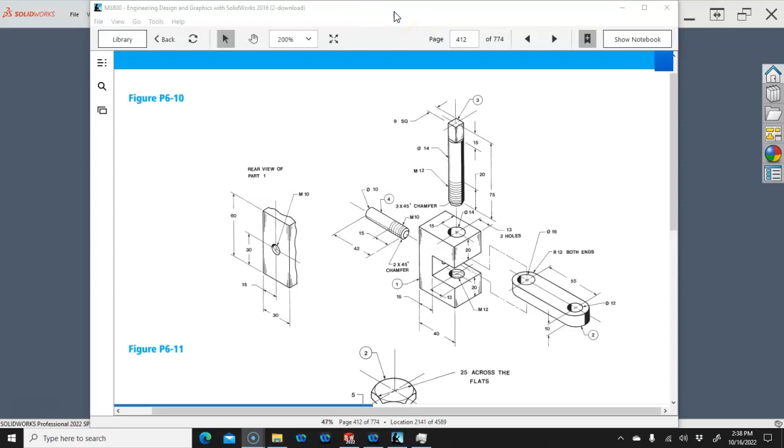Okay, so let's go ahead and get our part started, and we'll do the C clamp, or the C shape. So let's fly that out of the way. We'll start our metric part, and we'll go with the front plane and a sketch.

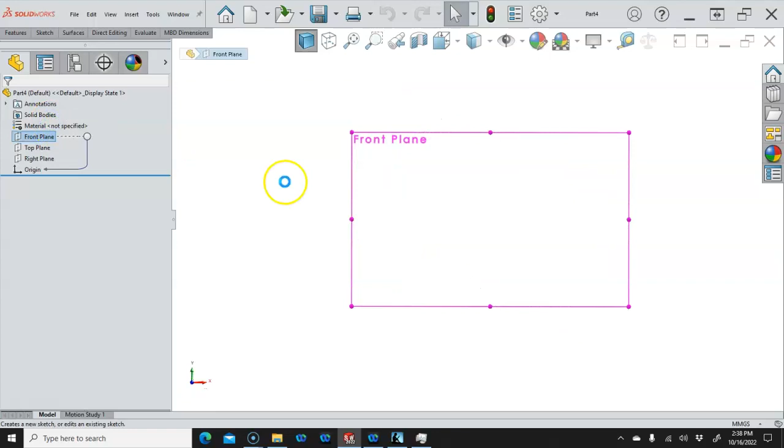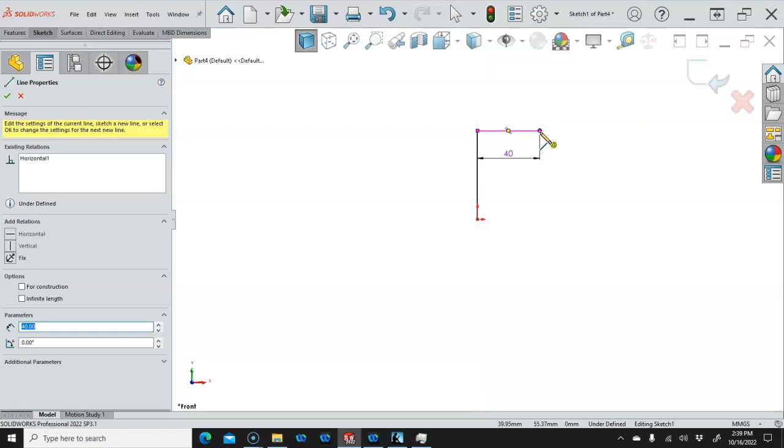And if I do L on the keyboard, then it doesn't really matter where we start. I want to stay with their dimension scheme though, so probably we'll drag that out a little closer to 60. And then across the top we have 40, and we can do that on the top or the bottom, doesn't really matter. And then that one is 20,

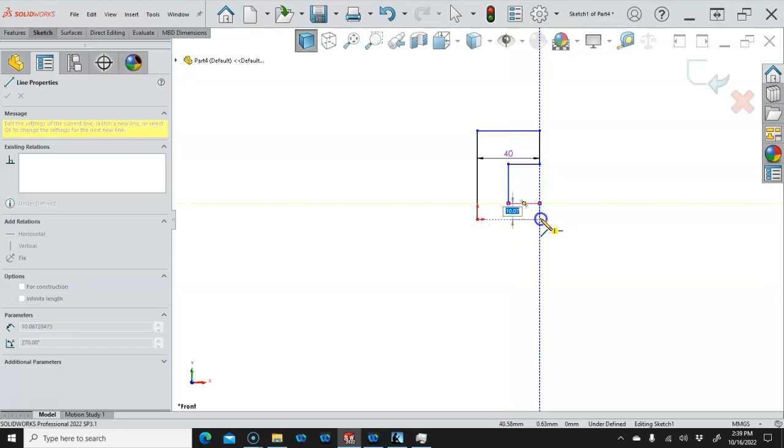20, and didn't take that one for whatever reason, so let's go ahead and fill those in, and we'll try again. Okay, and since it didn't quite line up, I'm going to go ahead and connect the dots and then just go back and tell it that it's horizontal.

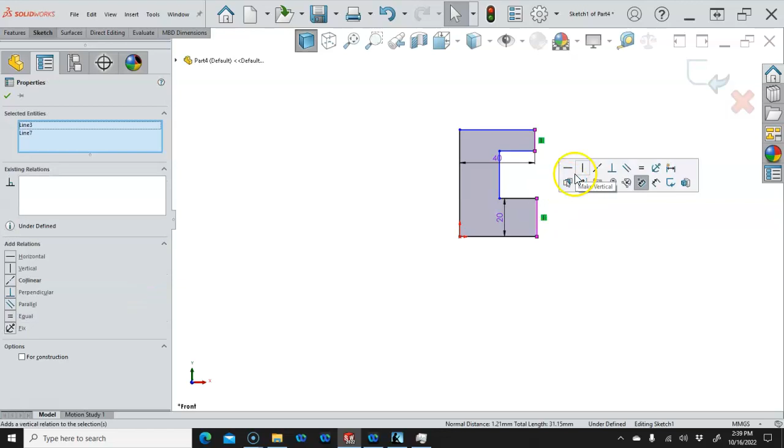Alright, so selection is if I think that these are always going to be the same, then we'll start off with collinear, and then I'll make them equal. And that way we have the 20.

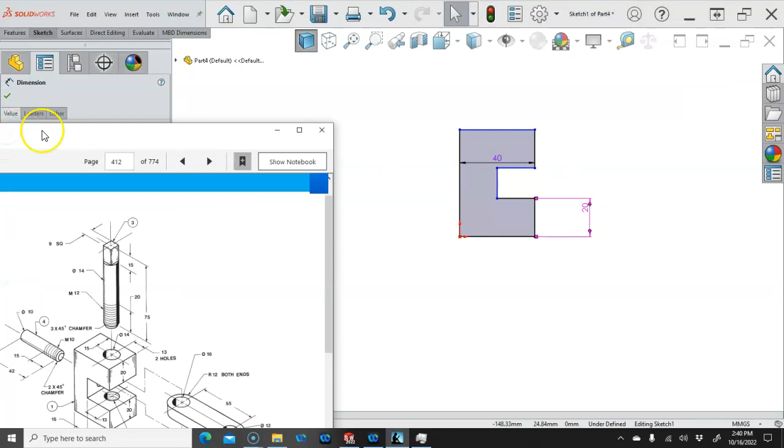Let's see, the distance in between. We go ahead and fly that in, see if we can find it. That may be a missing dimension, in which case we have a thickness of 10.

So we need a little bit of clearance, and then that one's an M10, so probably wouldn't put over a millimeter of clearance, but if that's going to be 16 with a 12, that's like 2 millimeters on each, on the radial. That's a lot of room to move around.

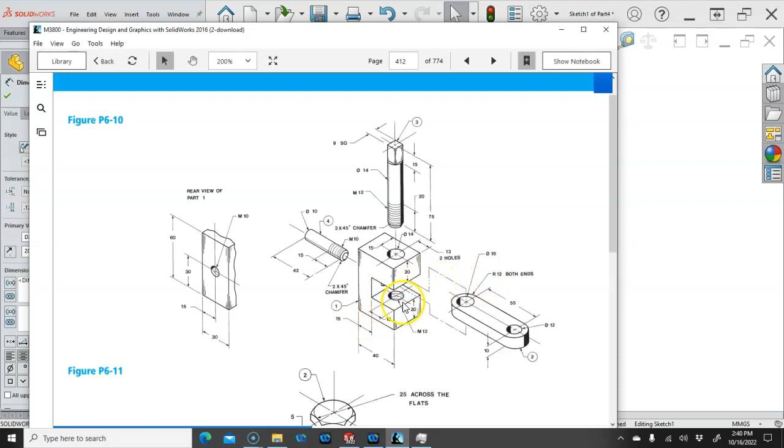And I'm not seeing that thickness, so you get to decide. Probably would expect something like 12, but I'm going to go with 11.

So let's pick the shape. And since there isn't one, I'm going to do an overall then.

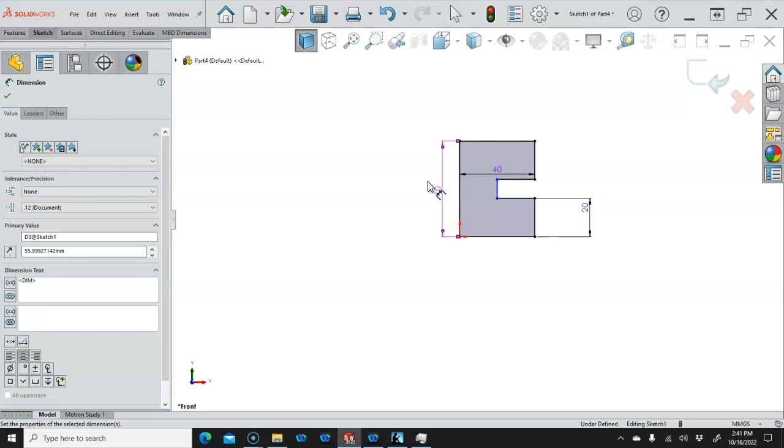So if we go 50, that'll put it at 10. And that would be kind of a standard number. I think probably too close. So let's go with the 51.

Okay. And then in our tolerance, let's see, 25.4 millimeters to an inch. And then that would put us real close to 2 inches anyway.

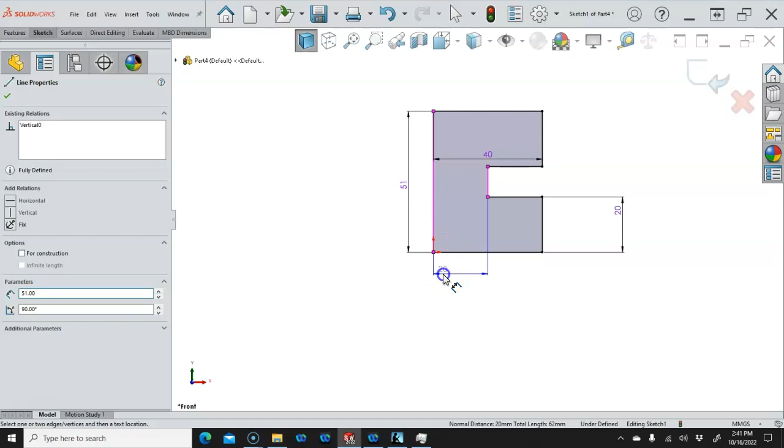All right, and then the depth, we have 15 millimeters from the back on the side, and that'll get us started for now.

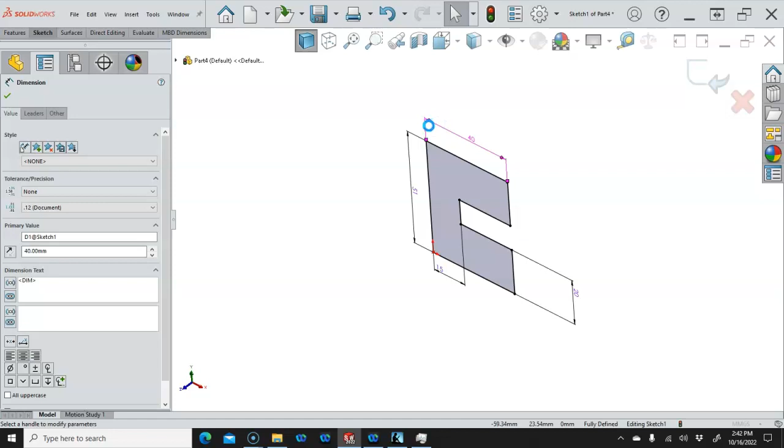So a right click and extrude. And I think previously when I've done this project, I've made it mid-plane. So if we do mid-plane, we can take advantage of that being on center. It doesn't really matter. So let's see, we have 15.

Is there a 30 somewhere? So again, looks like a missing dimension. So let's just go with the 30.

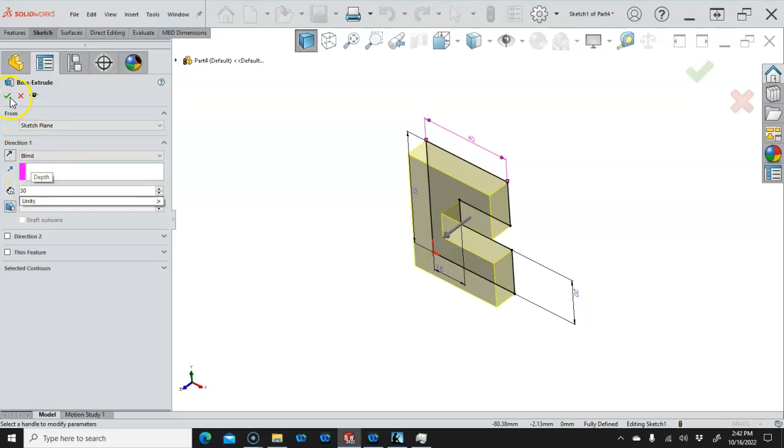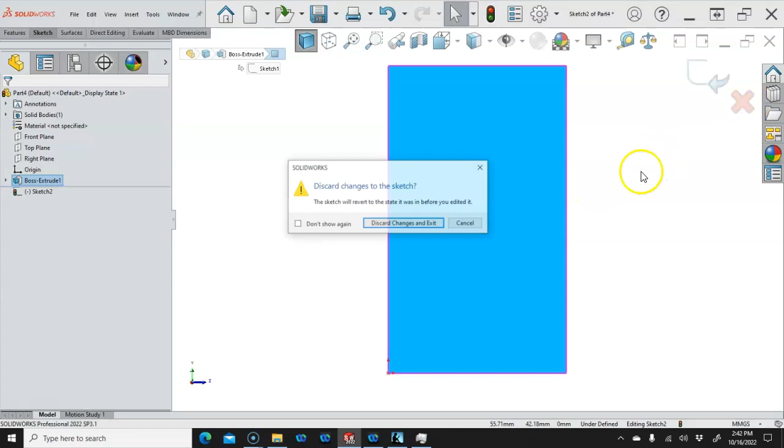All right, and we'll start with the M10 on the back, and since they're not giving us a pitch, I'm going to go S key, and that was a cut extrude, not the. So we'll try that again. Pre-select, S key, hole wizard.

There we go. They look kind of the same. And we'll let that come up. We're in ANSI metric. Going to thread.

Let's go ahead and reset. I usually reset the custom sizing. Don't really remember what I did last time.

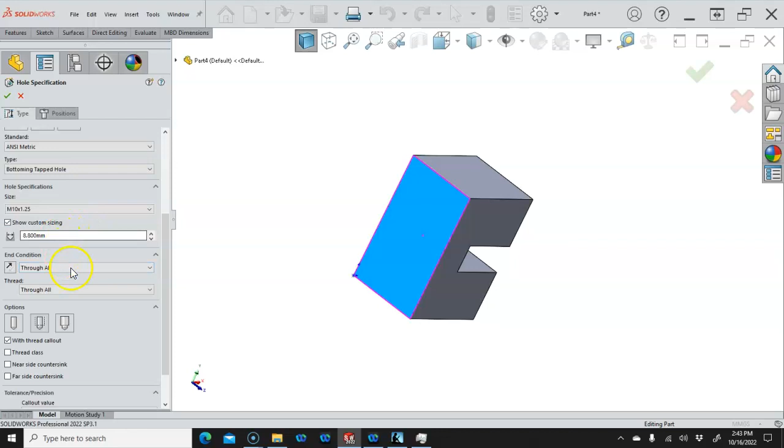So M10 by 1.0 is fairly fine. 1.25 is in between, so probably more common, and the 1.5 is a fairly coarse. So custom sizing through all, not really going to hurt anything. Positions. All right, and then we'll make sure that we're in the point tool.

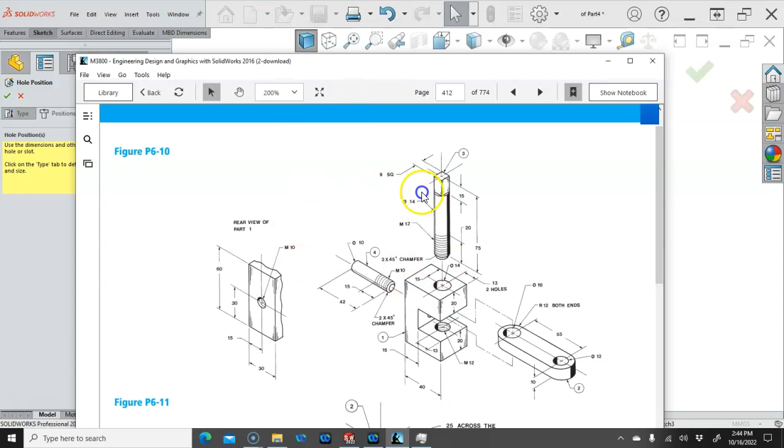And this one is going to be centered, so I could put it in the middle. So they have 30 overall, there was the 60 overall, so it was 20, 20, and 20. Somewhere in here, as we go through the iterations, we find it. There was the 60 on this side and 30 to the middle, so that's a lot of clearance for that piece, but it gives us the opportunity to use the width mate.

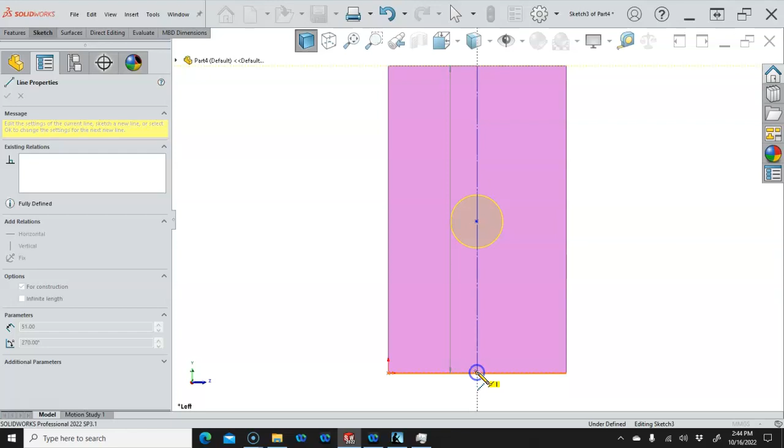All right, so that being the case, if I were to go with the line L, make sure I'm in the work area for construction, and I can say that I always want this to be centered. If I go midpoint to midpoint with that line, then look for the midpoint to place the hole wizard item, and we get that in position.

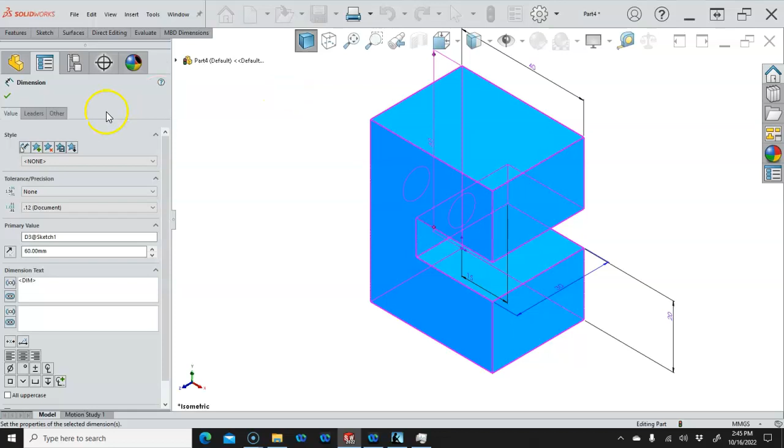All right, so if I double click on the boss, double click on the 51, change it to 60, we're going to see that open up. And then we need to rebuild.

All right, so after we've gone through that, this might be a place if you want to do the 14 millimeter through the top as a hole wizard or as the cut extrude, that would be okay. The M12 on the bottom would be okay, but I want to try this. Always open to an experiment.

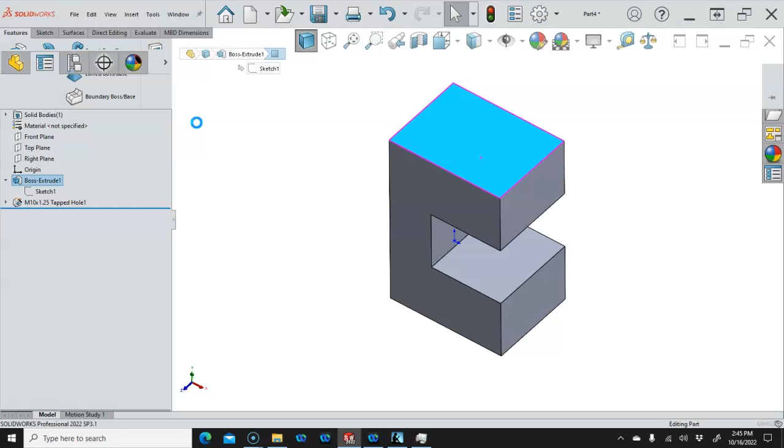So let's use the advanced hole. We'll make this a single feature, and so we have that one selected. This is going to be just a through hole. We'll pick it up from the ANSI metric, it's going to be a standard drill size, and we'll be going down quite a ways to find the 14.

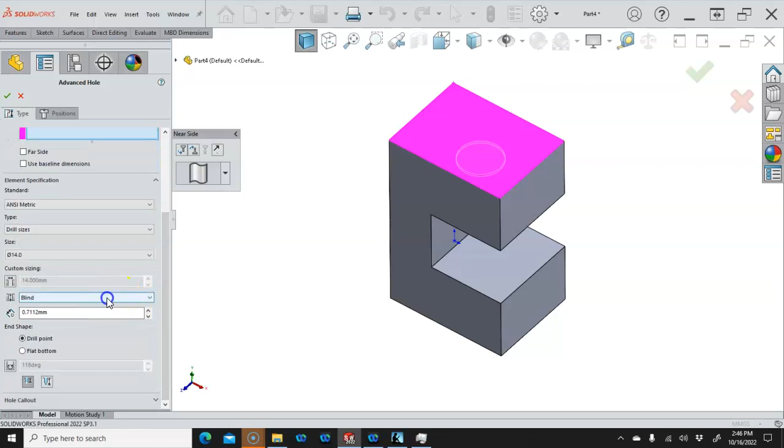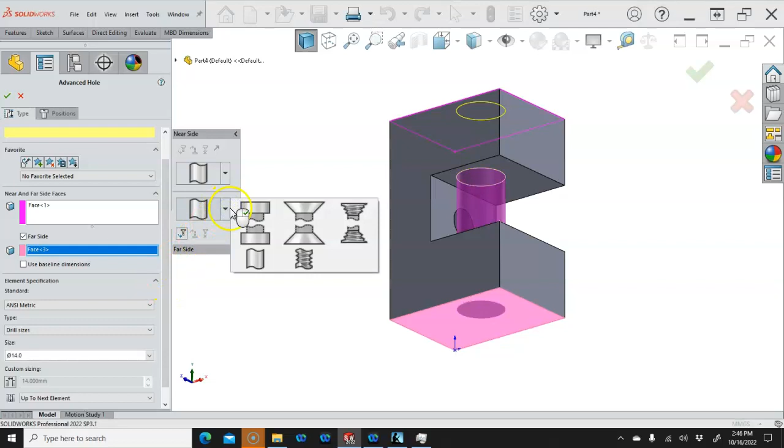Okay, so 14, and the end condition will be up to selection, so we can pick that inside face. On the back side then, we'll pick the far side, or what would be the bottom of the part. That shows it going all the way through, and we can do a straight tap.

And it's going to be not an M10, that was our M10. Staying kind of in the middle, the M12 by 1.5 is not the coarse, not the fine. And then up to next element is okay. And the thread class is showing as 1B. Now if it's going to actually be used, we're going to call it out as a 2B.

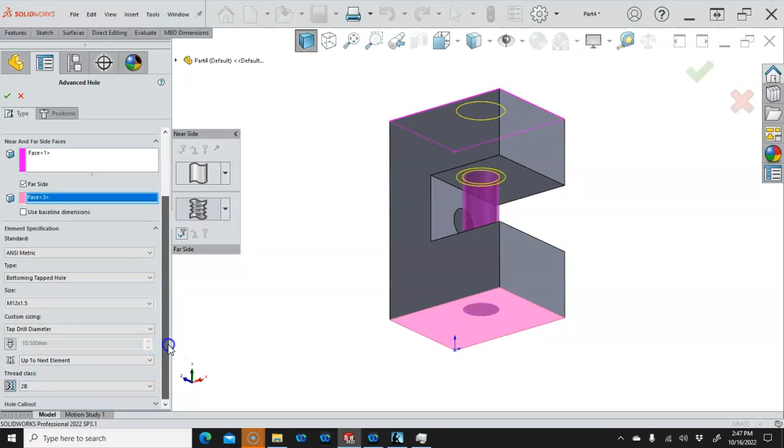Let's see what that gives us. So going from the top, we need to place it. Oh, I right-clicked. So just like in the hole wizard, right-clicking with that little checkbox kicks you out. So I'm just going to edit the sketch.

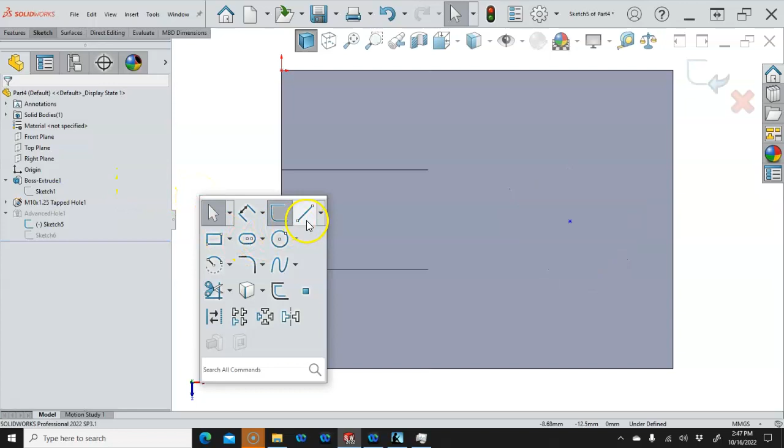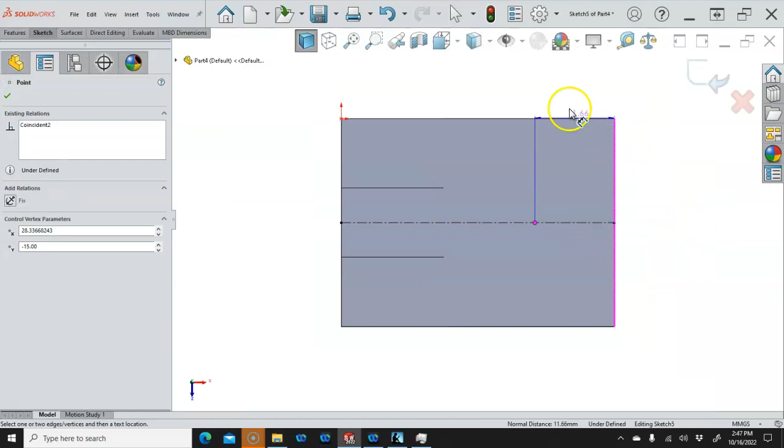We'll go S key, center line, midpoint to midpoint to establish our center location. Typically, unless there's a real good reason to offset it, these are going to stay on center. And then the pushback is 13. We accept it, and okay, so if this was two hole wizard features, that would be fine.

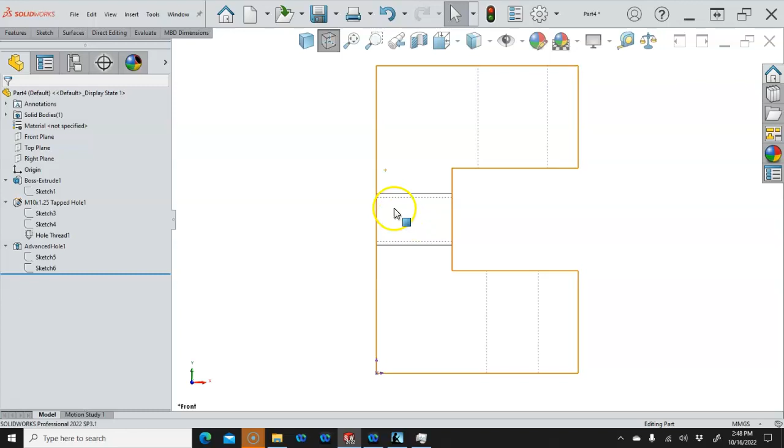What I'm not seeing in here is the cosmetic thread, so one of two things could be happening. The hole thread is there, and if we go to hidden lines visible, we see the hidden line for the hole and not seeing it on this one. So interesting that...

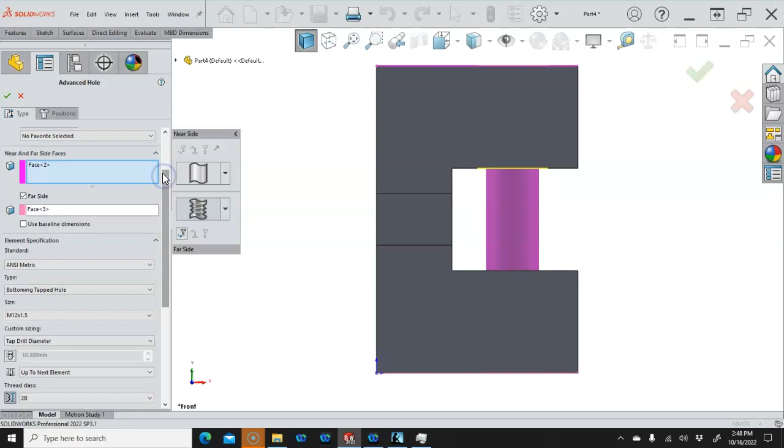Let's check that real quick and let it get back in. So on the thread, we'll see if there's a checkbox. The hole callout has the class, but it does not show the cosmetic thread. So callout definitions are going to show up in the drawing, but it did not pull the cosmetic thread, so we'll just go ahead and accept that.

All right, so we're going to use cosmetic threads a couple times. This is our new topic. So if I do a selection on that edge, insert, and all the way down a little bit further to annotations and cosmetic thread - cosmetic thread is what's going to give us those lines, that simplified thread form. This is going to be ANSI metric, and we're going to be at M12 by 1.5, hopefully.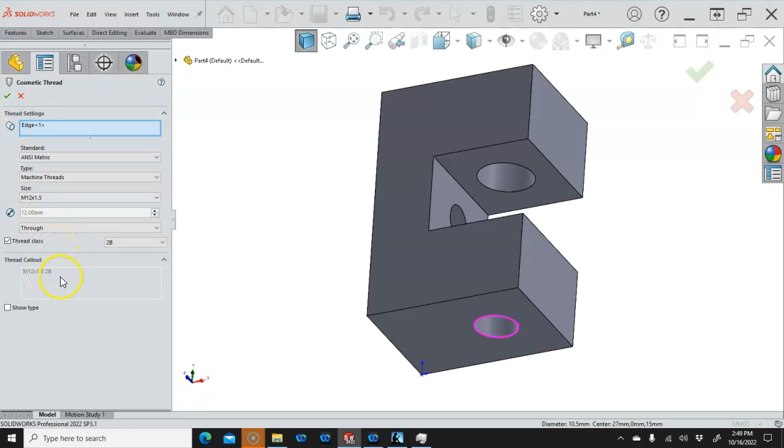There we go, it's right in front of me. We'll go ahead and do the thread class again as 2B. I really don't want it to show the type in the drawing, but if it does show the thread callout as that, that's going to be fine. Usually this is more of an H value with our taps or with our callouts.

So now we have the lines and all of our geometry for the C bracket. All right, so we're going to save this. We're going to need to establish our file documentation trail, so finding my location, my assignments, I'm going to create a new folder, assignment 4. And this is going to be the C bracket.

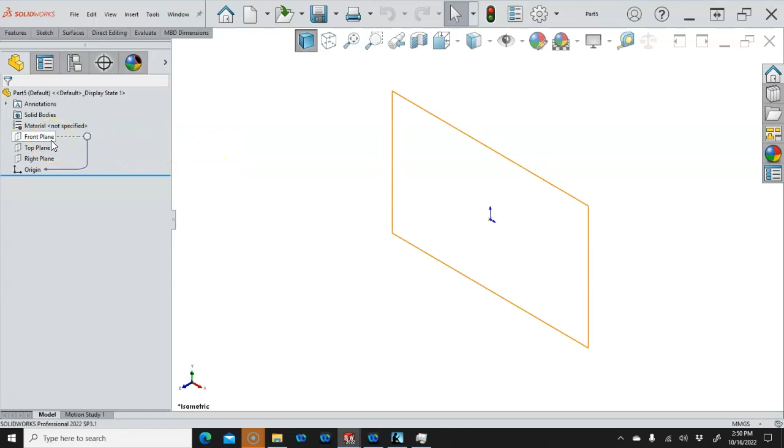Okay, so we can go back into solid. Let's go ahead and pick up our next part, and we'll do the link, kind of the obround, with the obround. Let's go with the top plane because that's what I want as far as where it's going to go into the assembly. On our choices for the obround, we have the straight slot or the center point slot. So if it's going into material, it's a slot. If it's producing material, it's an obround.

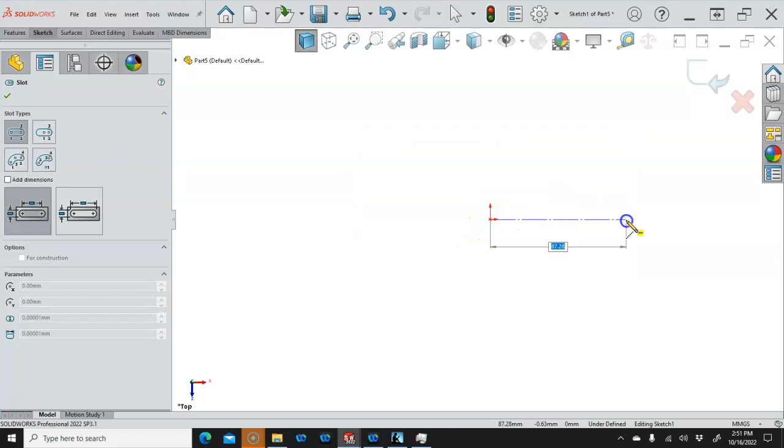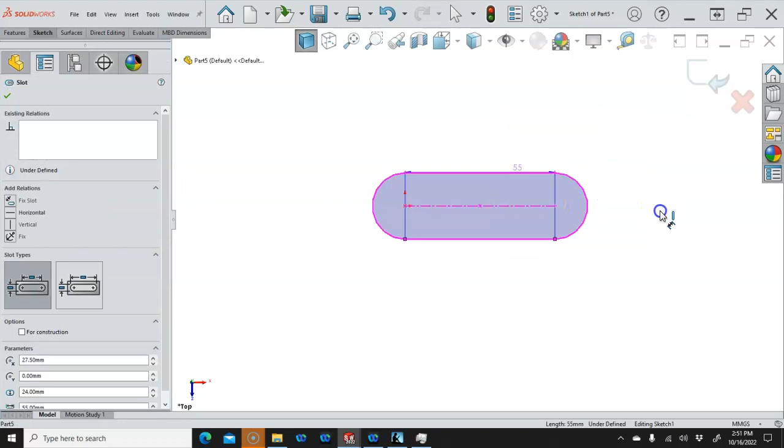All right, so the center is 55. And then we bring it out, and now it's staying pretty consistent, so 24 on the width. Yep, the obround, even though we put in those inputs, it did not keep them, but if I enter them, then that numeric input, they should come out at least on location.

So 55, and then we'll wait for it to catch up there. Okay.

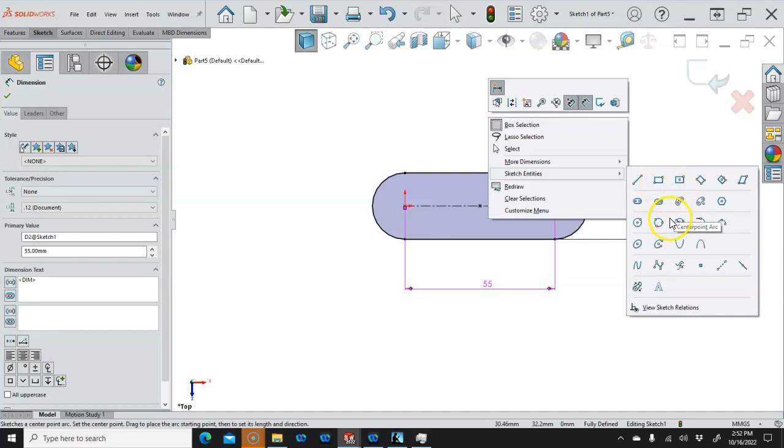And then I want to go into sketch entities, or we could do S key in the circle. We'll draw the two circles, and that has a diameter of 12. And I believe they are both 12. Nope, one of them is 16.

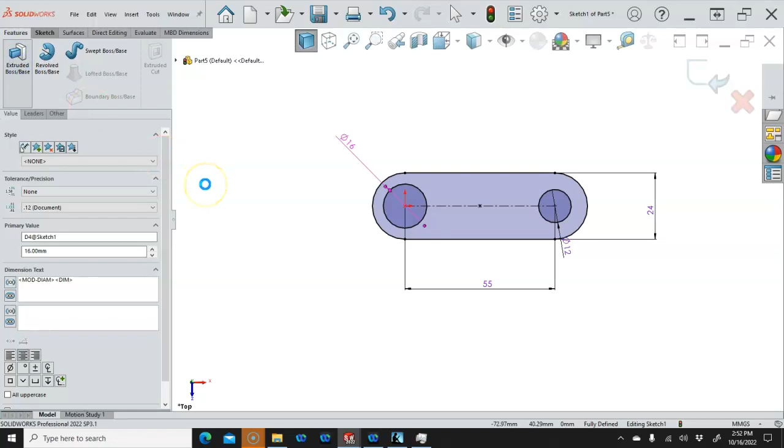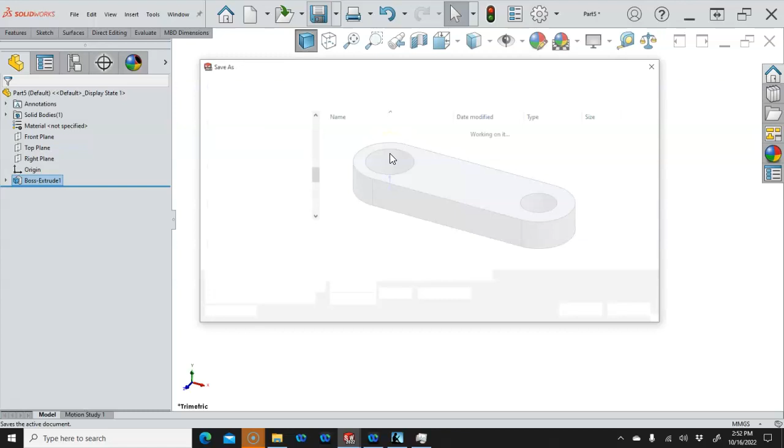That's right, we said that was going to be fairly loose on the shaft in the orientation that they have it. And then the features will extrude, and it will go to 10 millimeters. And we'll save it. Make sure it checked, there we go. Save, returns to my folder, and this can be the link. Save.

All right, so the pins, the 10 millimeter, I'm going to go ahead and close these since my computer is lagging a little bit.

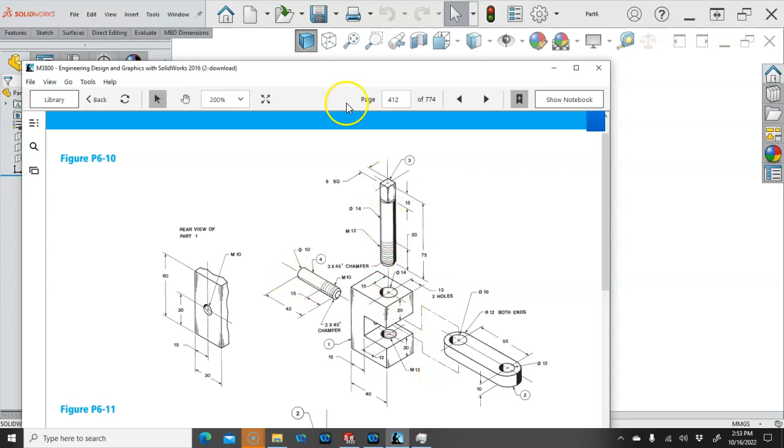And the part metric. So the pins, if we want to stay with the orientation for the one on the left, I would put this in the right plane and go that way. And then when I bring it into the assembly, it's already there. And this one from the top, it doesn't really matter if we do them from the front. We're going to be able to maneuver them around in the assembly. So let's just stay with that as an example.

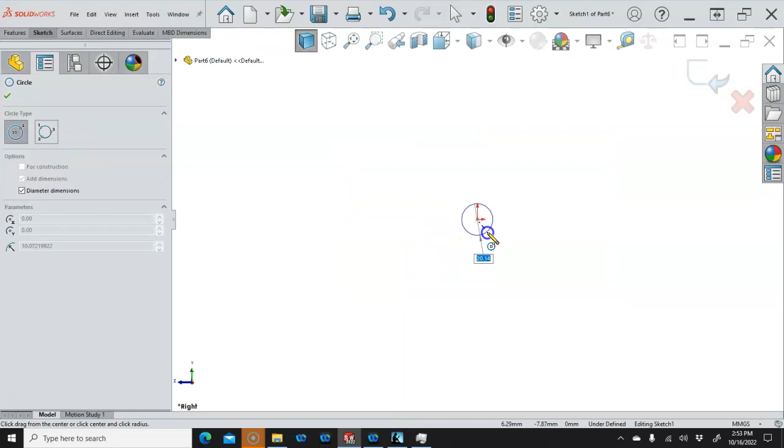And S key circle, so an M10, and we said the major diameter is going to be 10 millimeters, and we're going to extrude that out to a total of 42.

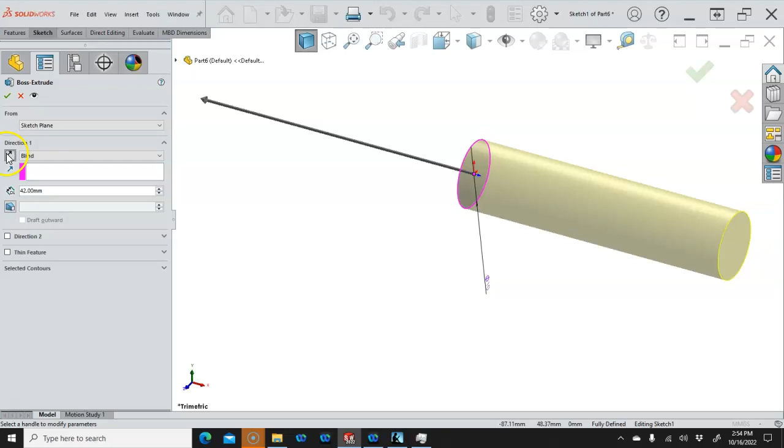And that looks a little better. And just on orientation, I want it to go the other way. There is a 2 millimeter chamfer on the leading edge. I thought maybe there was a radius on the backside. That looks kind of sharp. I'd put a radius or a chamfer on the backside too.

Alright, so we'll go in, pick up the chamfer, and on the chamfer tool, we're going to go 2 millimeters by 45 degrees. On our choices up here, we have the angle and the distance and distance, and then the other lengths. So I'm not seeing a preview, so let's go ahead and check it.

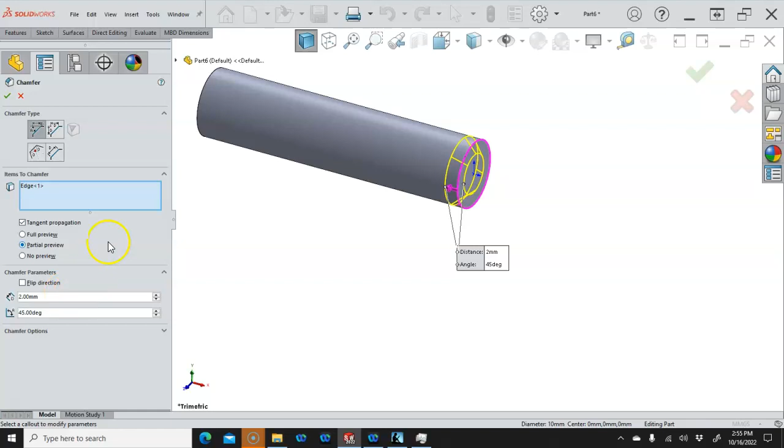And tangent propagation, really does not like that. Well, let's make sure that my number is correct, and that's 10 millimeter diameter. Chamfer. Now that would still leave 6 millimeters on. There we go, got the preview that time, so I don't know if it just hung on the 10 millimeters, which it certainly cannot do.

All right, and then picking that leading edge, insert, annotation, and this is one if I was doing a lot of these, I would probably add it to the heads up or add it to the S key, and we'll do some customizing here with these guys. So the M10 by 1.25 I believe is what I put in there since I'm picking the metrics. And it is not going to be through, it is going to go 15 millimeters, so blind condition, 15 millimeters.

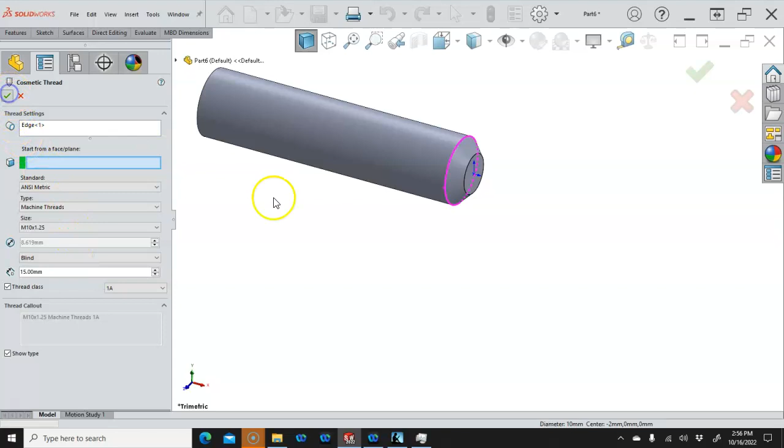And we look at it from the side, that looks pretty good. And we'll go with the M10 pin.

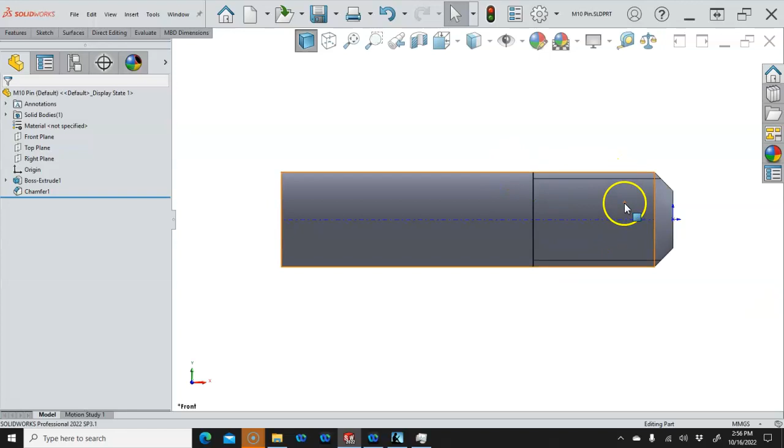If I wanted to, I could go ahead and adjust this. I have not had a good reason to use the sketch plane. Say I wanted to put the M12 pin in the other orientation. So before I mess this up, let's do a save as, because I will overwrite the existing if I'm not paying attention. Save as copy and open, and we'll rename this to M12 pin.

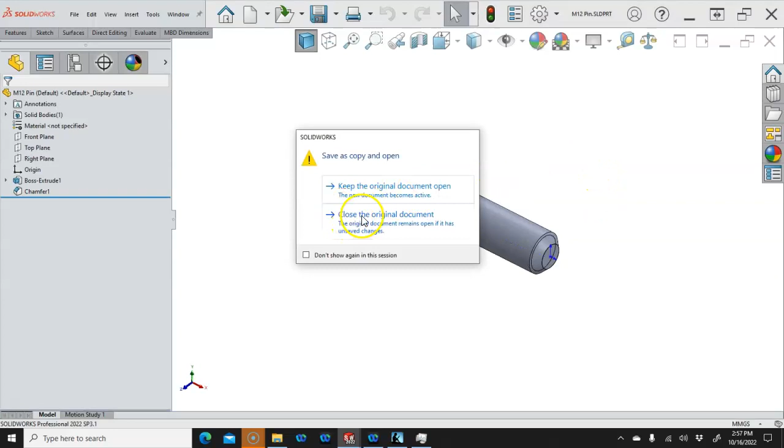Save. This is a little trick that comes in handy occasionally if you're not too far into the sketch. We can go ahead and close the original document. If the geometry is not too difficult, you can edit the sketch plane, going from the right plane to the top plane, and accept it.

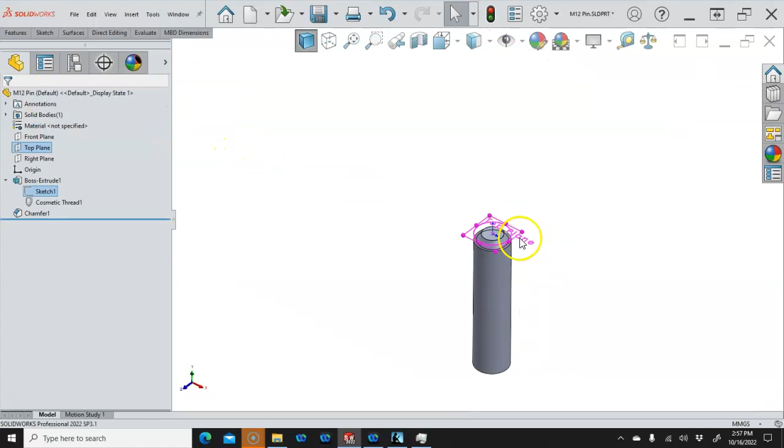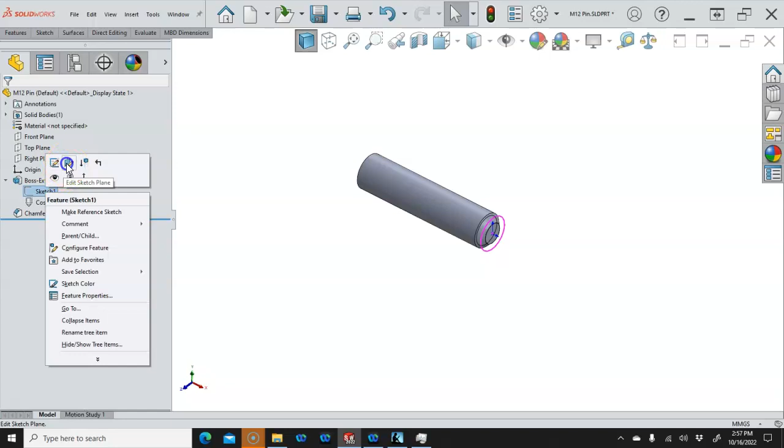Now it did go the wrong way, which is not entirely out of the question. So if I edit it again and go back to the right plane, that should bring it around. You've got a 50-50 shot at it. And top plane, nope. Okay, so we're just going to edit it. Occasionally I can walk it around those planes and have it generate the geometry the other way.

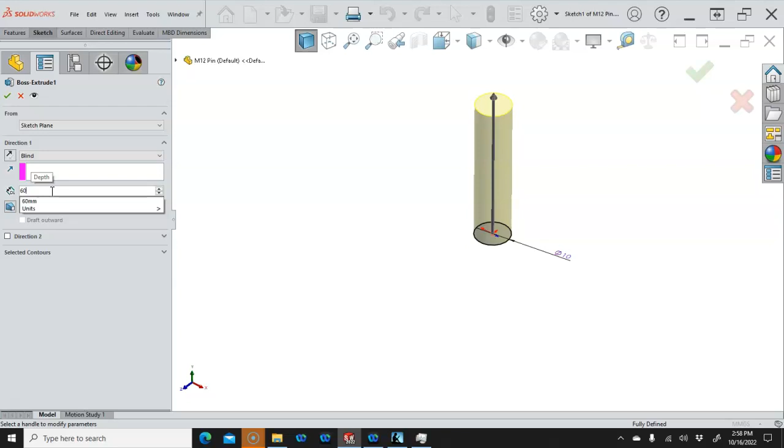So our overall on this is going to be 75 minus 15 because I want to add the square. We'll look at another process. So 75 minus 15, I could type that in and get to 60, and we'll go ahead and accept.

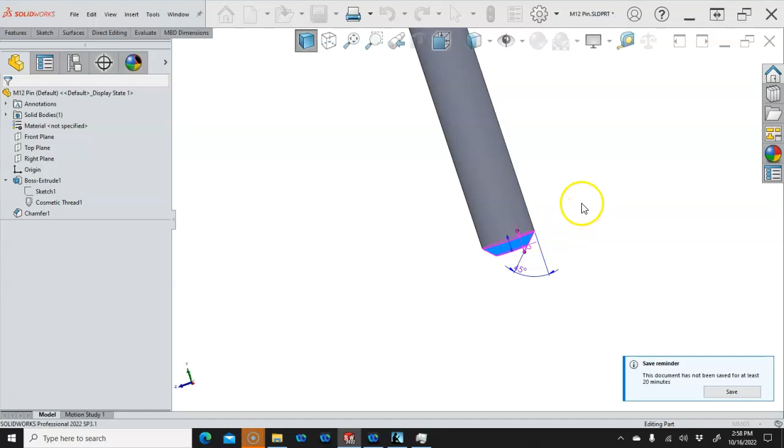And then the chamfer stayed, and it goes to 3 millimeters. So if I can identify that, and we do a rebuild. All right, we'll try that again, rebuild.

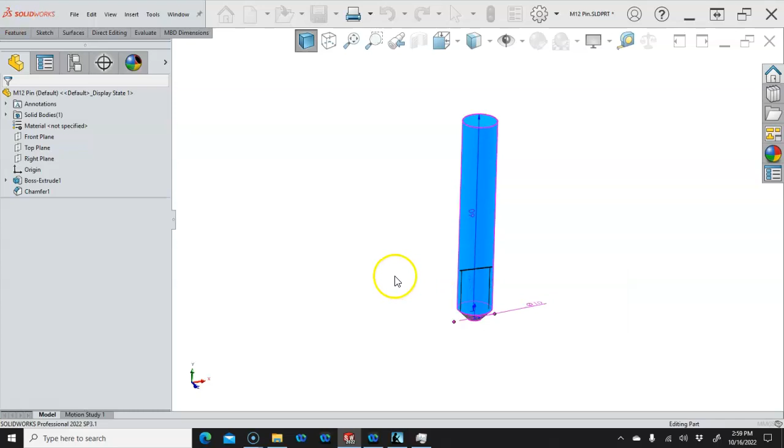Okay, that looks better. The cosmetic thread, oh yeah, we need to adjust for our diameter. That goes to 12. And the cosmetic thread, we'll see, might not be too happy. We haven't rebuilt it yet, so let's go ahead and edit it. Just like the rest of our items, if we right click and edit the feature.

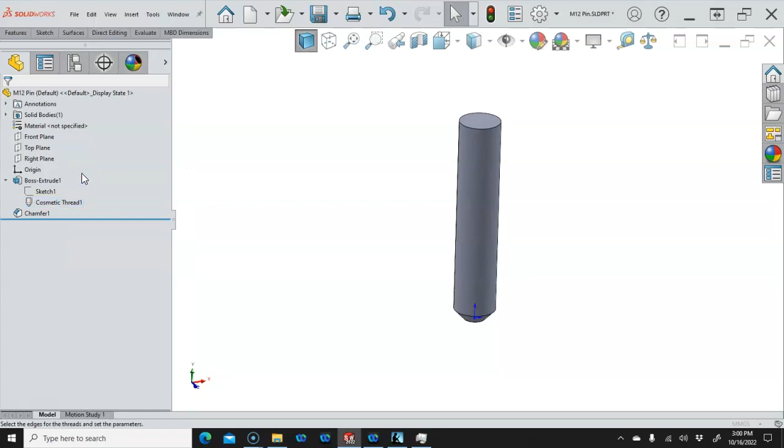All right, and then also don't be hesitant if this gets too crazy, it's going to recognize that it needs to go ahead and rebuild. So it updated. If this gets too crazy, don't hesitate to make this a separate part. Same process, extrude it out, put the chamfer on it, then we'll put the boss in.

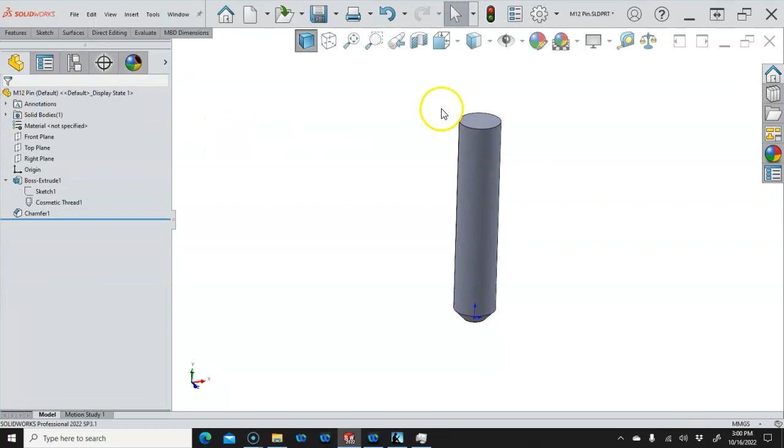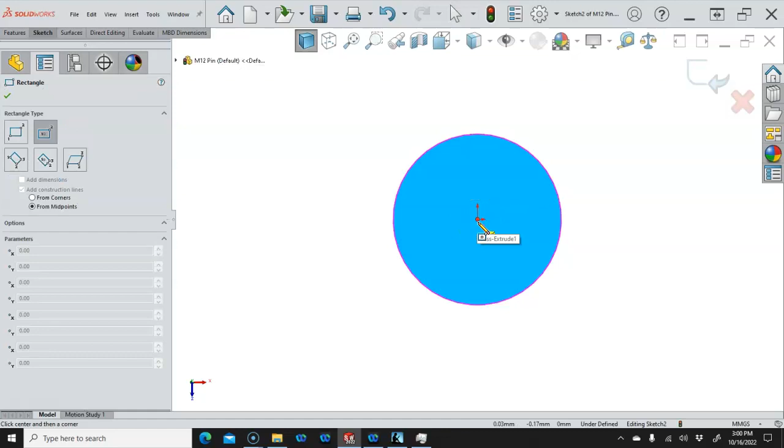Opening up a sketch on the end, we will right click, S key, do the pull down center rectangle. And the rectangle is 9 squares, so if I do 9 enter and 9 enter, it will automatically add the equal relation. This is where it gets a little interesting in that we have the corners to contend with.

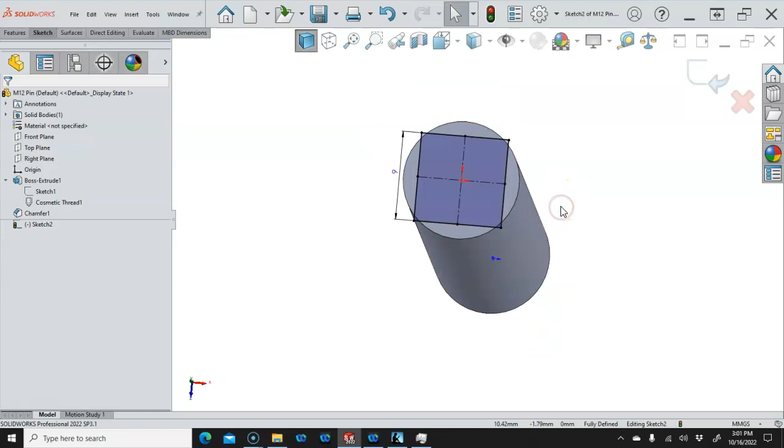Typically you would make this on a lathe, do the threading, set this around, and then cut those corners. So the choice is to extrude this out and then chop those off, or we could go ahead and do a convert entities.

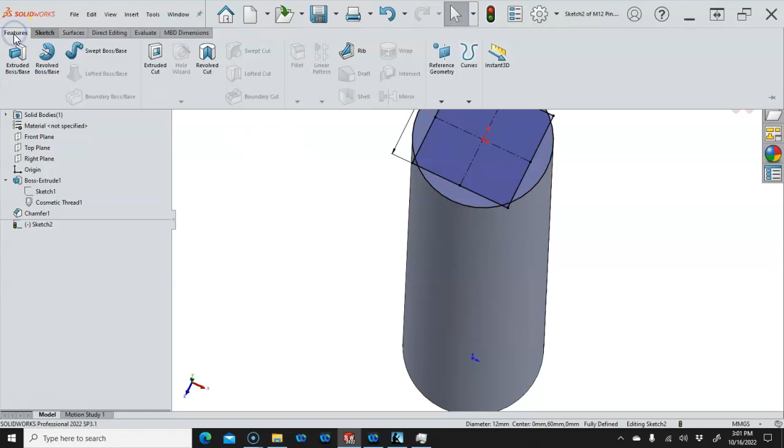And then in our features, or right click and extrude, we need to pick. Okay, so that one's selected. It's going to be 15. We are merging the result. And then the contour will be the interior, and go ahead and accept it.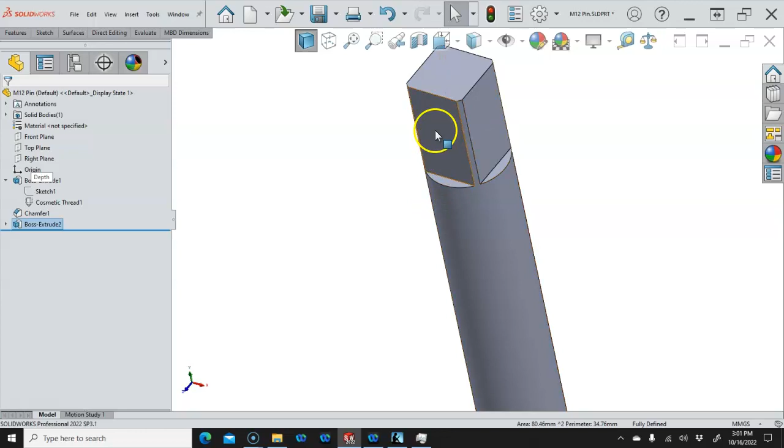The other option is if we had drawn this cylinder all the way out and put that box on the end, then when I go to make the extrude cut, I don't think it's going to show up here. If I were to make an extrude cut, I would flip this side to cut so it would remove those little items. So we'll do that later as an example.

All right, so M12 pin, oh yeah, we already have that one. There's my 4 parts. We're ready for the assembly and the drawing.